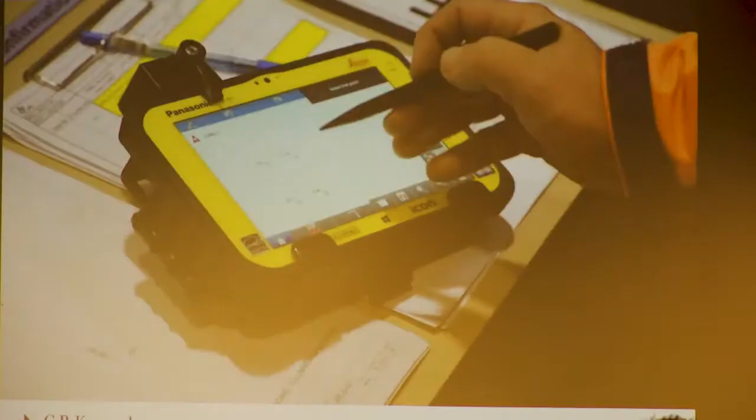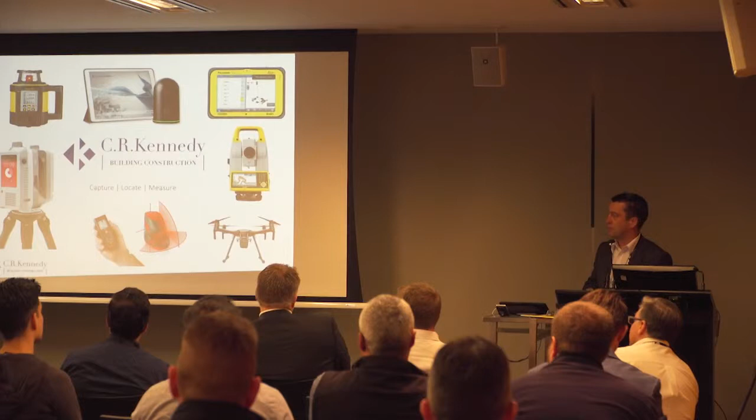That gives a little snapshot of the types of solutions we offer in terms of everything you've seen here in the last few days, scanners and total stations, and the solutions that go with them. Our range of products, solutions and expertise extends well beyond that into everything from laser levels to UAVs and the high-tech drones that we provide.

So that's all good and well. We're very happy to be involved in technology and everything that it brings, but I think our key strength is the company we work for and the people involved in that company.

We're quite a big national company, offices in every city. We've got around 100 staff just in our survey division, and probably 250 staff all up. The offices all contain technical support, teams sitting behind the phones doing backup and support. We have dedicated service centres as well, because for this type of equipment you need the requirement to keep it up and running and valid in the field. So we've got offices fully equipped with the necessary servicing support, all accredited by Leica.

A lot of that you can gain from our website. But drilling down a little further, within our building construction team there's myself here in Victoria, there's Matt Rumbelow, who I'll introduce in a minute, he's based in Adelaide but covers a fair bit of territory, Chris Johnson in Brisbane who's on the road a lot, and we've got Rusty Webb over in Perth. These are the guys dedicated to our building construction segment, supported by the larger C.R. Kennedy community.

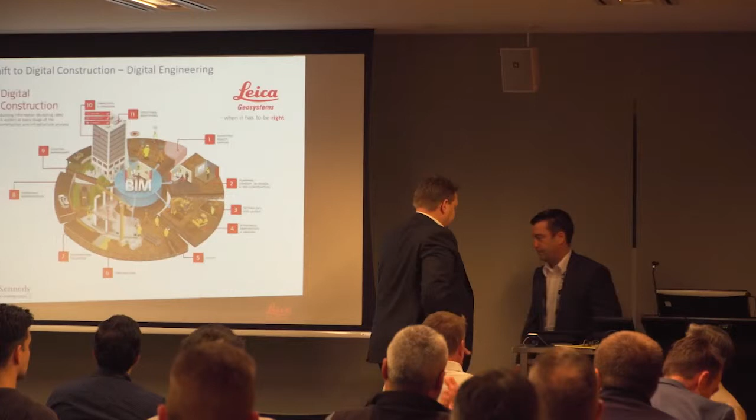Thank you very much, Bernie, and good to be with the AMCA yet again. It's good to have some continuous involvement, which is key to making that relationship work. Good to see some new faces in the front, some old faces I know from around the back, and some sad faces at the back. We'll see how it goes for the rest of the presentation.

Now, it wouldn't be a BIM presentation if we didn't have a pie chart of some description. So this is Leica's pie chart. It's actually pretty good. This is part of a campaign, I guess you'd call it, but it's also a booklet that's out the front, and we can provide some digital versions of it if you like, called The Shift to Digital Construction.

It covers all of Leica's involvement, as Bernie said, from civil works, coming out for earthworks, all the way through to building management. So it's a good one to keep referring to constantly about where this sits and how these tools we're going to see today can be used across multiple segments. We've got multiple customer bases now who cross over in some cases, and in other cases hand through the data, which is great.

So I'm going to start with the video. Autodesk trained me well. Now this is basically a review of probably the biggest product that we've had for a long time, and as far as impacting most industries that Leica wasn't normally associated with, it's the BLK. It's actually here. I understand if you didn't see it because it's that small, but I'll just recap what the BLK is for some of you in the room.

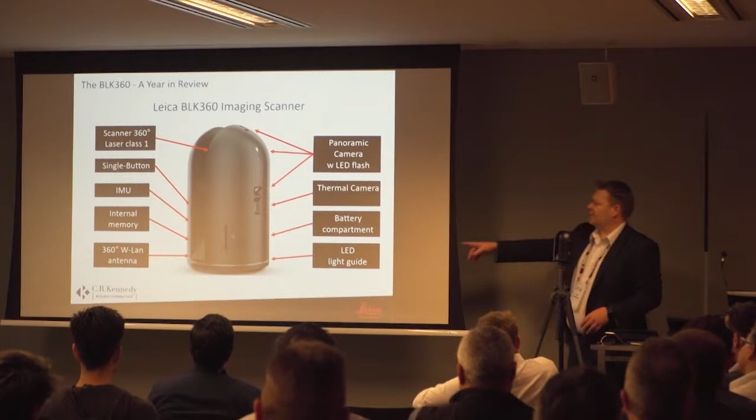That's it. So all crammed into this device here are all of these features and probably some more. But certainly I made the title A Year in Review. It hasn't even really been a year that we've had the BLK, and already we've sold lots, volumes, but also more importantly, who we've sold it to.

People who wouldn't have normally got into the scanning market at all, wouldn't normally have been able to integrate scanning as part of their normal deliverable. And so that's engineers, that's some manufacturers, a pool repair company, climbing wall guys. Yeah, amazing. Just amazing uptake of this device.

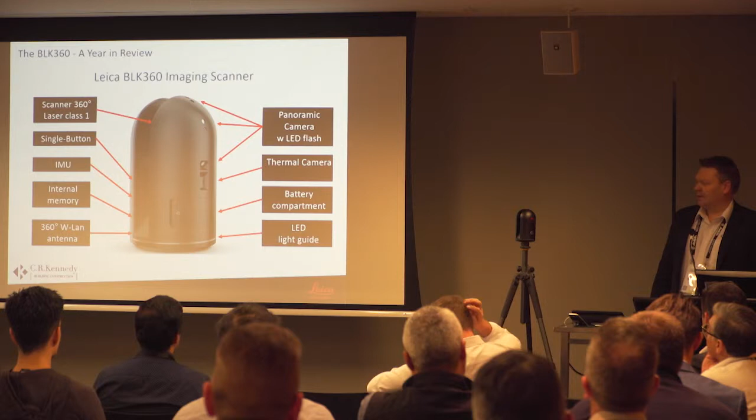And for those of you who are a little bit interested in LinkedIn and online, there's a guy who's pretty prolific now, no it's not me, who's from the film industry. He's talking about how it's used in set design, lighting design. Actually, lighting design, we've got another customer whose true story will be appearing in the next Leica magazine. They do projections and nighttime projections against built assets. So yeah, amazing.

That's obviously in no small part due to the collaboration, the working relationship with Autodesk. They were heavily involved in the BLK from its inception. Obviously, from a software point of view, it ships in the box with Autodesk Recap. That means it goes straight into your BIM workflows with very little skilling up. It's certainly almost a single button operation - there's only one button on the front, that's for sure. With a little bit of understanding of Recap and how the clouds go together, it's an amazing tool.

Now, things have been extended, I guess, in the way that the BLK works, and certainly in relation to thermal, that's now been released across all the Leica products. There's a lot of interest in how that might apply to building design and getting feedback from an initial understanding of a space and thermal performance of a space. So that's something I think we'll see a lot more of.

And the ability of just sharing those 360 panoramas is extremely impressive. So much so that we've actually had good success with some of the smaller non-Leica 360 cameras, just to get that idea of a spatial capture when you don't really need to go into a full scanning machine.

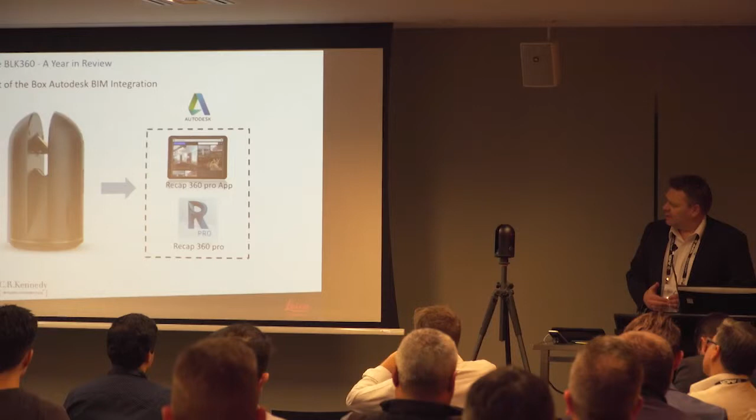So that's great. Now, speaking of that software, that's basically the way it shipped, which was Recap Mobile, the first app that was developed for it, which allowed you to use it from your existing, almost your existing, as long as an iPad Pro, existing hardware, and then transferred straight through into Recap desktop and therefore the BIM solutions from Autodesk.

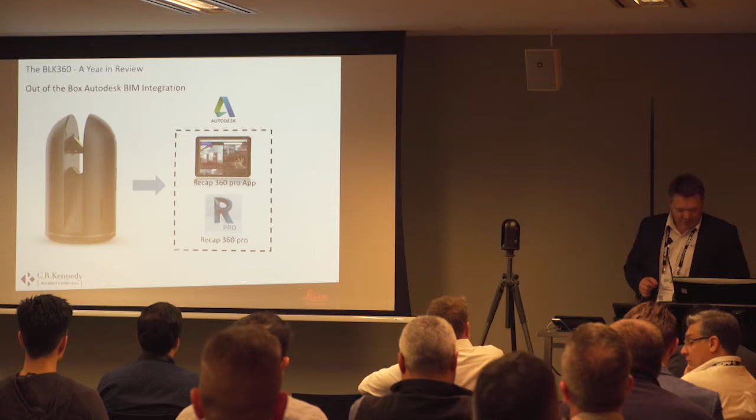A few months afterwards, there was the release of the Leica Cyclone Register 360 - it's a long name - and that's a newly written interface into how you can acquire Leica scans. In the past, and I'm one of them, the Cyclone system is particularly particular, and a bit hard to get your head around. This has been a redesigned interface and a much smoother workflow, and you'll see a lot more development within that Register 360, which is sort of the entry level of the Leica platform, which is great to see.

There's more a consumer-focused BLK app. That's just had its almost year anniversary and its first point release, so that's 1.1. And that allows you for free to take 360s, simple scans, measure on site, and export to E57, which is a common file format. So that's a great way of working as well.

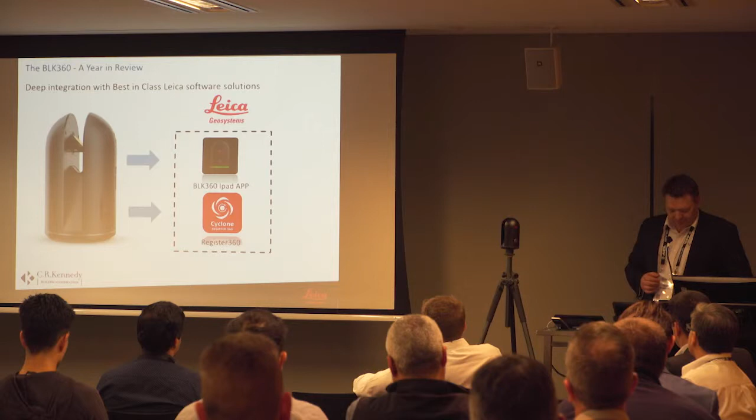And then, literally 5 months ago, no, less - we've been using it for longer, but as far as public release - Matterport, which is an extremely well-known spatial capture system as well, but photographic, not laser.

We now have the ability to integrate with their system, so they can use both the BLK hardware and the Matterport hardware, or if the need arises, just the BLK alone, but in their own system. That allows a whole industry, really, of real estate capture, asset capture, to use the BLK now without any training at all, because it fits in their software and in their workflows already. It's just another camera that connects. I think you'll see a lot more of that sort of openness in this type of device as well. So yeah, probably the smallest and the most open of the hardware that's around for scanning, which is great.

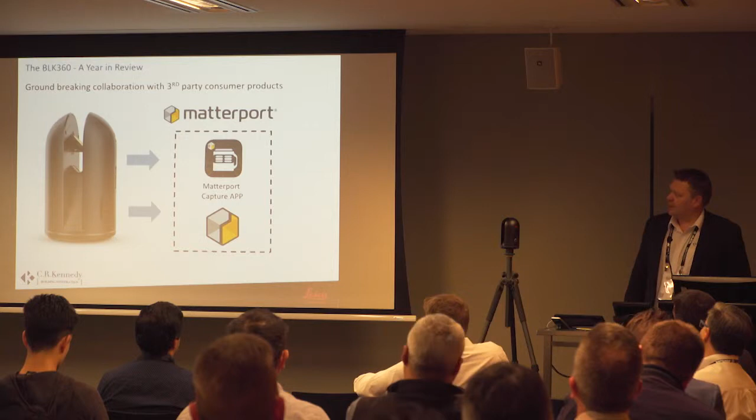What I wanted to do in this section about reviewing where we're up to with the BLK is just show some examples. This is a company that I work with in Adelaide. They have a Melbourne office, and they put together this video basically to show us what they've been up to.

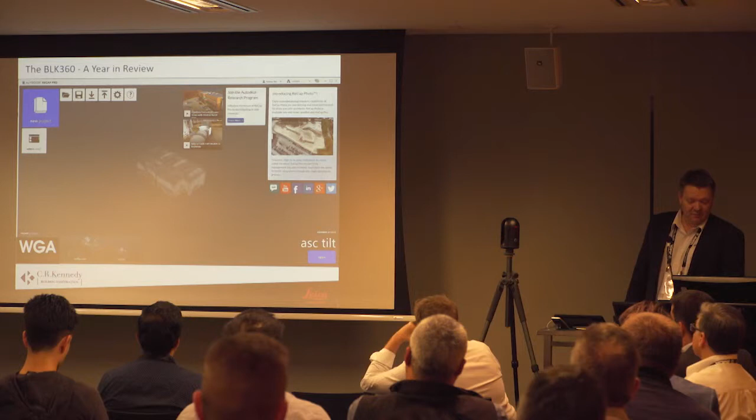So Wallbridge Gilbert Aztec are structural engineers. They have a bit of civil engineering as well. They've utilised point clouds in the past through engaging surveyors, but they wanted to bring on this hardware to allow them to do jobs ad hoc, and they were pretty confident they could handle jobs this size.

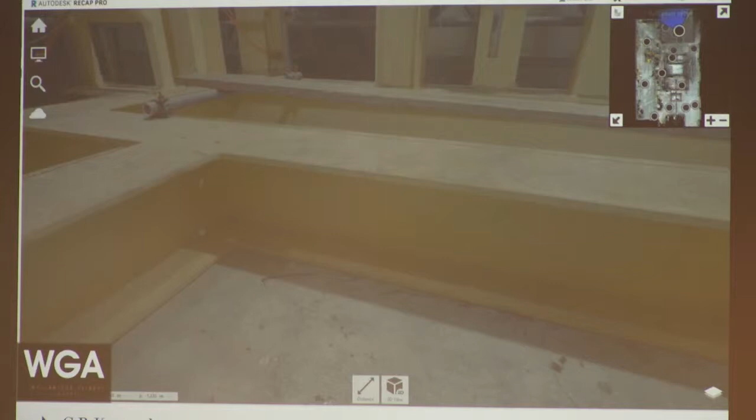They still engage surveyors for larger work, but this is well, I can't tell you where this is, but it rhymes with submarine, a facility in South Australia.

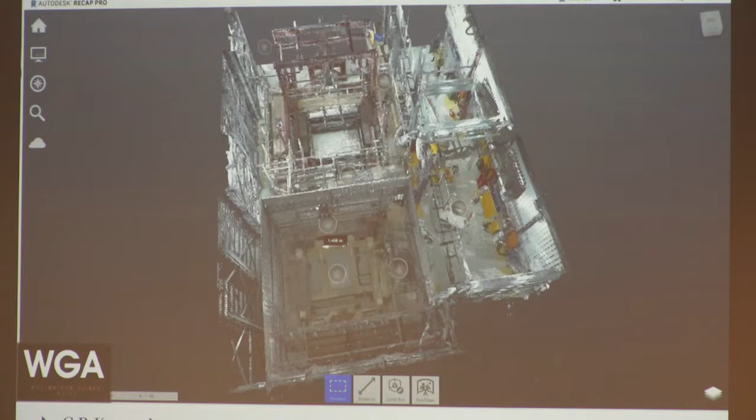So their workflow is taking this scan set for this job into Inventor, so Autodesk Inventor, a manufacturing fabrication type tool. Actually, you can see it here now. And then they do assessments on the structure and some additions for some change in some engine requirements where that was going into.

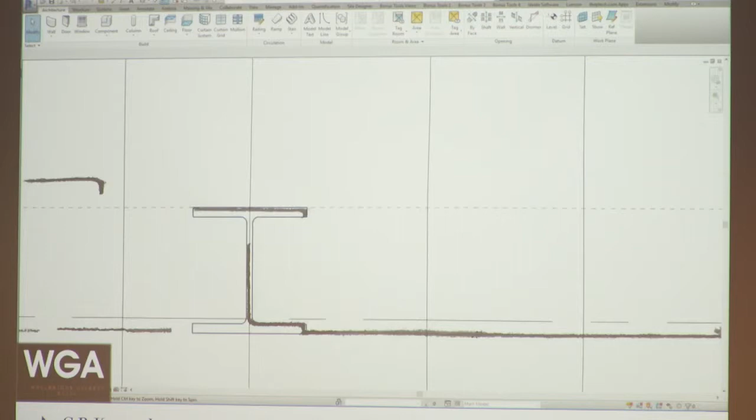So they admit they're fairly new to this workflow. They're not using any sophisticated extraction tools or fitting tools. Certainly that's on their path, and we hope to be able to assist them and do a little bit more analysis of the scans as they bring it in.

Interestingly, they bought only 2 months ago, really. So when the RTC - I don't want to ruin your announcement, Greg - they were initially a bit peeved. They wanted to buy it as well, but they admitted that their directors probably wouldn't have gone to that level straight away.

They needed something more of an entry-level machine to prove its worth, show how it would integrate with their delivery, show how they could schedule it between offices. They've got 3 offices. So yeah, it's a perfect sort of step into spatial capture.

And we'll finish on this one when it comes to the BLK. This was announced last night, so just in time for us.

My name's Brian Nickel. I'm the engineering division manager for Harvey's in Bozeman, Montana. We're a mechanical engineering firm, and we work plumbing, heating, geothermal, sheet metal fabrication, as well as hydronics and radiant heat in the Gallatin Valley.

It's been around for almost 30 years. It started by Bob Harvey's father, Sam, and it started as a 2-man mom and pop shop, and it sort of evolved into a multifaceted fabrication firm.

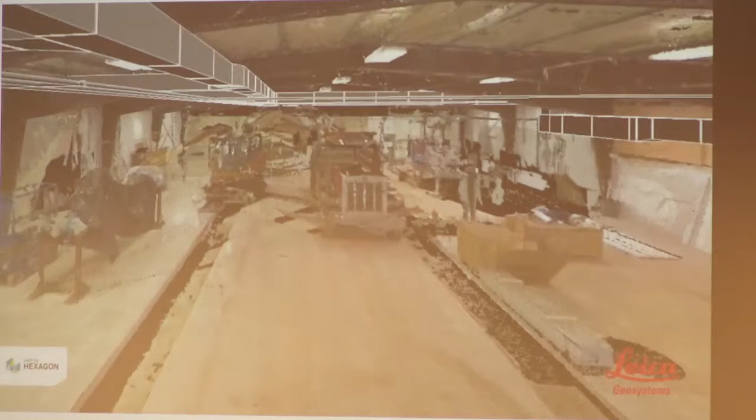Clients appreciate the most about working with Harvey's the deliverable that we offer. Since implementing our Leica BLK 360 scanners, we've been able to provide them with as-built digital reconstruction point clouds of their homes. And so that works in numerous methods.

Down the road, if there's a serviceability issue or some sort of event arises, they're able to reference back to that, and our service division is able to reference back, and it mitigates a lot of the reconstruction or deconstruction of retrofitting and modification needs.

We rely primarily on Leica Geosystems because the BLK 360 allows us to do our job right and to do it once. We don't have to go back and forth between the schematic drawings and our engineered drawings.

We're able to go out, scan the existing conditions, get real world verification, bring that back into our office without any sort of missing information because it's captured the existing conditions. We're able to validate what we've engineered and what we've designed to coordinate with other systems, electricians, subcontractors, other entities that are involved, and it ensures that the client is getting that end deliverable.

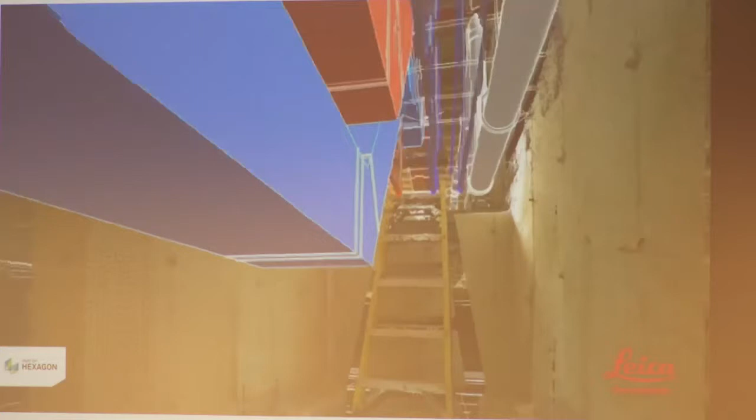The number one thing that our company, Harvey's, preaches to not just our employees, but also towards future clients, is that we provide quality with integrity that you can trust.

So it's a matter of understanding and communicating to the clients that our end goal is the deliverable for the client. It's holistic. It's a holistic vision. We want to be able to provide the client with a deliverable that is valuable, that means something.

More often than not, a client will go to a mechanical engineer, provide a schematic drawing of what's going in their home, and then send that out to several contractors, and it'll end up getting broken down into something completely different than what was initially designed. So our mission moving forward as Harvey's Engineering is to provide that deliverable to the client of what is actually going into that client's home.

And it's for the added benefit that the client can have bargaining power in the future. They can actually negotiate future services that need to be done in their home because they have the documented systems in their hand, in their pocket.

But that was the BLK, and certainly we see it just growing as far as its input and impact into the market. But we were asked a few times, 'That's great, I like it. Have you got anything just a little bit better?' And now we have. So with that, I'll pass you on to Gregg.

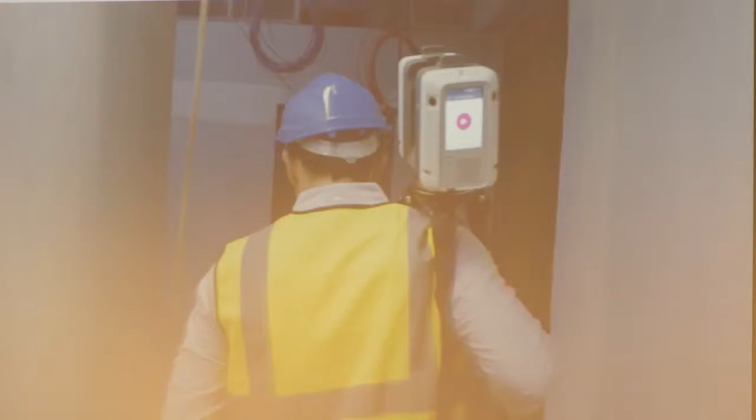In seconds, the Field 360 app links the scans, stitching them together into one clear point cloud that helps me do my job faster, easier, and with greater accuracy. Back in the office, it's time to check the scan data and catch up with the rest of the team. The RTC 360 has changed the way I do my job for the better. Documentation and workflow are simpler and quicker. I get so much more done in a day.

With powerful automated software tools, I can focus on what's important, digging into the project's details and getting on with the next. Thanks, Leica Geosystems.

So the RTC was several years in the making. The RTC stands for reality capture. And there's some very, very interesting and unique technology inside, which we'll talk about in the coming slides.

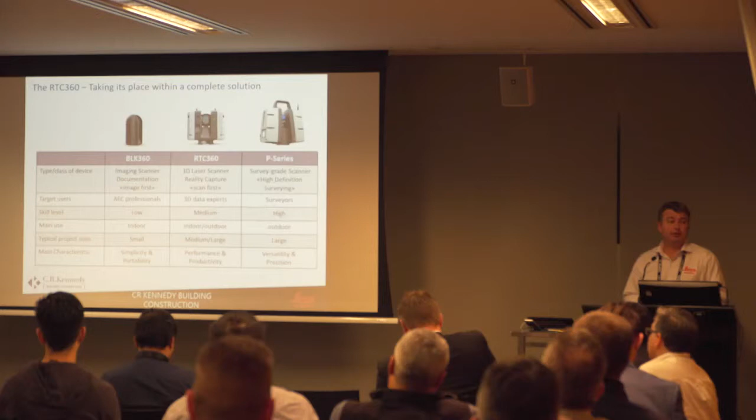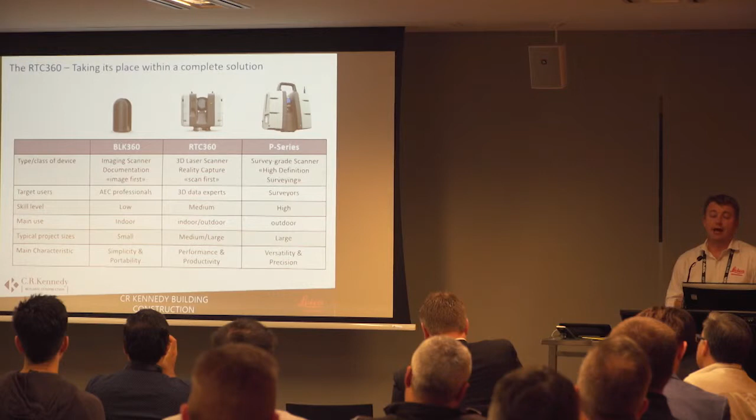As Matt said, 12 months ago, we released the BLK, which has been fantastic. If you need to do things like check verticality of facades or you need longer range, our P series is still what we call our survey grade. But between the P series and the BLK, we had quite a large gap, and the RTC fills that gap really, really nicely. There's a number of key features about this which makes it so much faster than everything else on the market, and one of those is the 2 million points per second, which you've probably all heard about, and the other one is the VIS technology.

And the RTC has really been from the outset targeted towards plant and building construction, and actually a third segment as well, which is public safety—the police force, crime accidents, car accidents and things like that. But definitely plant and building construction is the key market that we will see the RTC for.

So right from the start, it was really aimed for people like you. It was not aimed for traditional surveyors. And for that, we wanted to have as automated a process as possible. We wanted to have in-field checks to give you a nice, warm, fuzzy feeling.

It was all about the images being just as important as the scan data. The other part was that we wanted to have a solution approach rather than just building the hardware and then thinking about what happens downstream. So the solution itself is made of 3 parts.

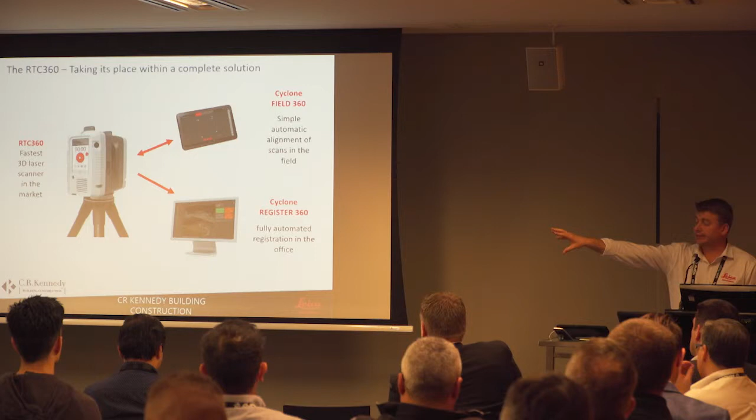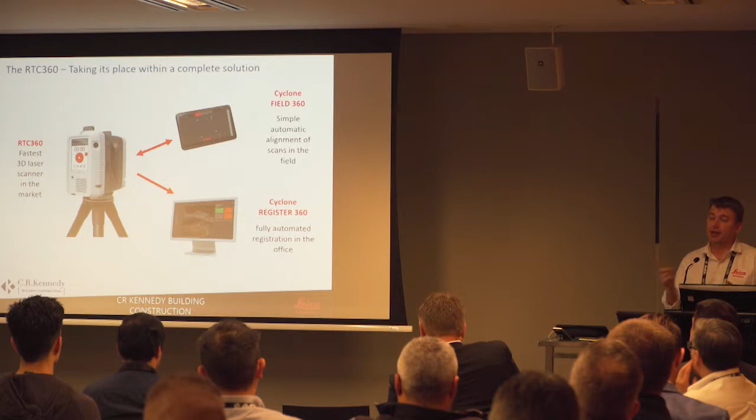It's the RTC 360 unit itself. There's some Field 360 software which sits on a tablet, which really takes away that pinch point of the registration, which previously happened back in the office, which is great for new users. And then the third piece is the Cyclone Register 360 software, which you use back in the office.

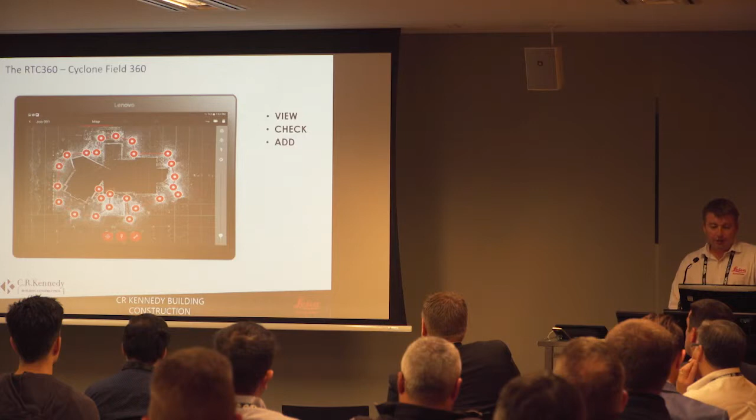So the software on the tablet, Field 360, lets you see the scans as they come in real time. So you can see the project build up as you work around, which is great because you can see the areas that you've missed and make sure that you're capturing them.

And the Cyclone Register 360, as Matt said, it's really about trying to make that as streamlined as possible. And as we say, it's drag, drop and done. It's really made it as easy as possible to do reality capture.

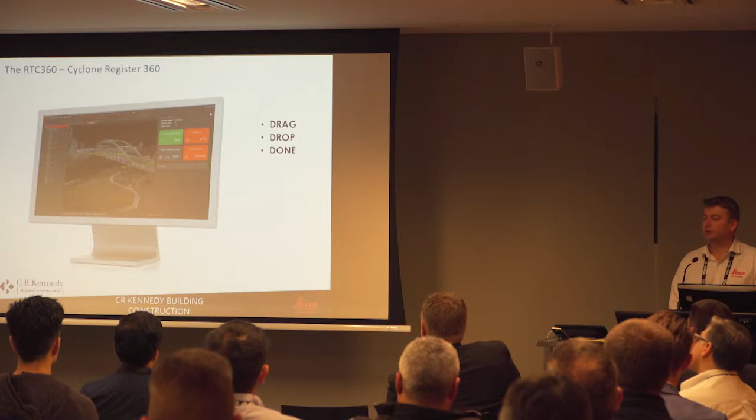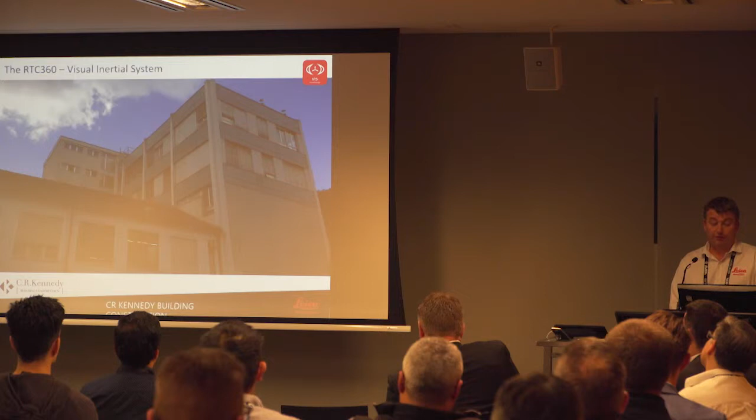As I said, there's some really interesting, unique technology inside the RTC 360. One of them is what we call the VIS, the Visual Inertial System. We've got this great little clip here, which is going to show you what's happening. There's actually 5 cameras on the RTC, which are continually tracking as you move around.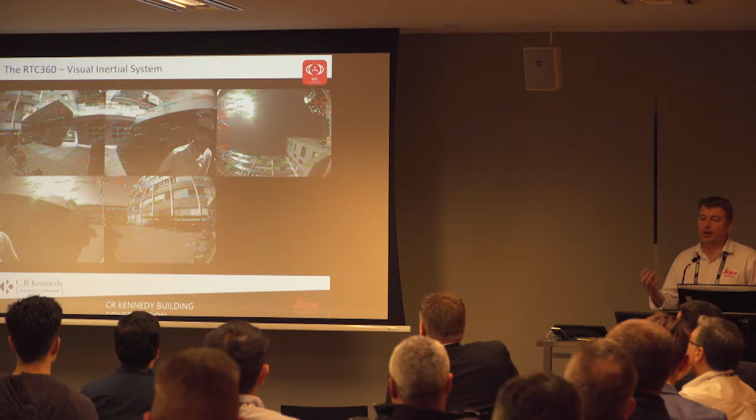So all you do is turn it on or off. You don't have to think about anything else. As you're moving around, those 5 cameras are just keeping track of where you've been and where you've gone, so that when the scan's finished, it automatically knows where that scan is in relation to the previous scan. So that's a really powerful process, which makes it just so much easier for new users to use.

The other new piece of technology is this, which is what we call the double scan. Because it scans so fast, the head designer said, well, how can we utilise that? So what he thought is, if we can do 2 scans consecutively and compare the first scan with the second scan, you can identify pedestrian traffic or road traffic, which makes that cleaning up process much, much quicker and easier.

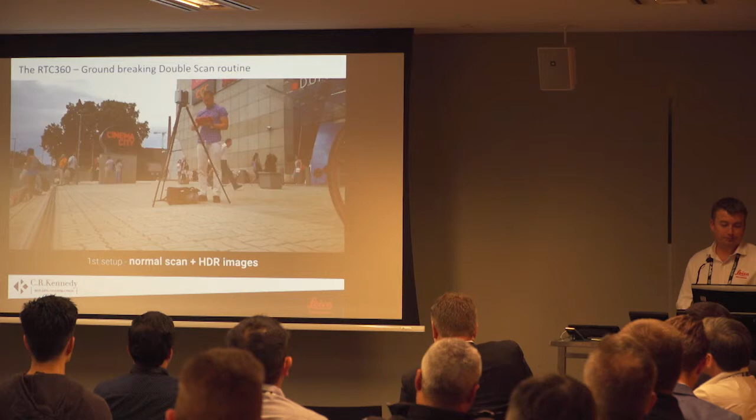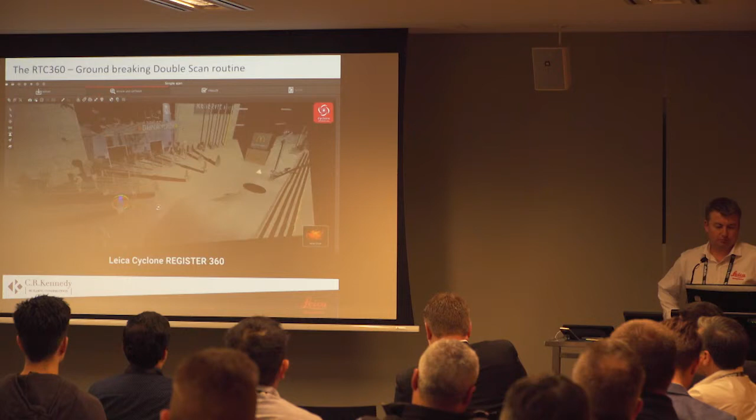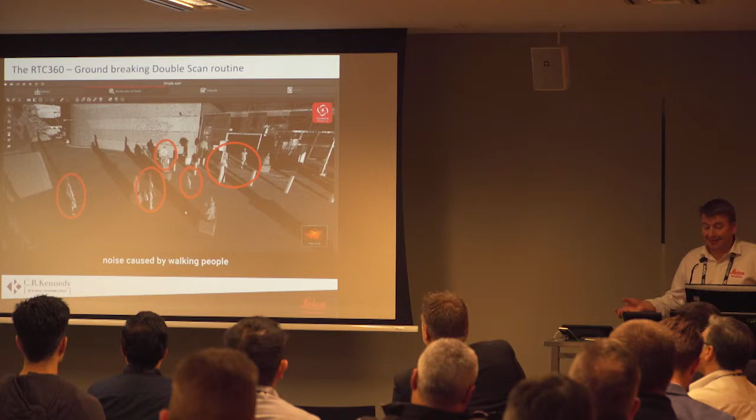And as you can see, we're outside a shopping centre with a lot of pedestrian traffic. So that's showing one of the scans, what it would normally look like with all the pedestrians in there. And then when you bring that double scan into Register 360, it identifies the areas that weren't in the previous scan and it deletes them for you. So you can see pretty much most of that pedestrian foot traffic has disappeared.

Two very, really interesting, unique pieces of technology which really help you out. So let's have a look at how this works.

So I've connected to the tablet and all I've done is just press scan. We can see that the RTC has already started to scan. So I've got this set at a medium scan. There's 3 resolutions that we can scan at. Most people we think will use the medium resolution scan.

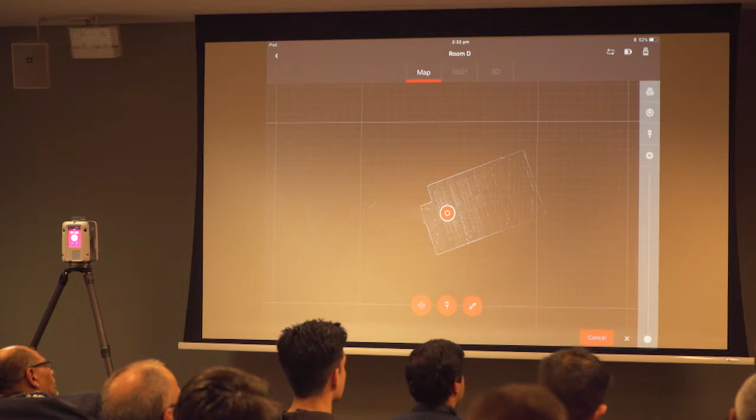At the moment it's scanning at 2 million points per second because there's a double pulse. That's quite a technical feature of it, which enables white surfaces to be scanned really well, but it also enables black surfaces to be scanned really well. So that's another piece of interesting technology in there.

When it's capturing images, it captures an HDR image. It will always capture 5 brackets. Like I said, it's been designed to be very user-friendly. You're either capturing colour or you're not. It does sound like it's going to take off, but it's just going really, really fast.

When it captures the images, it will always be a minute. It won't be more or won't be less. So that's one of the reasons why it's so fast. It's not only the 2 million points per second, it's the really fast HDR capture, and it's this VIS process that we talked about, which overall, when you combine that, you're really gaining multiple efficiencies in capturing your data.

So the scan's finished, and now it's capturing the images. Like I said, that'll take a minute. And previously, before you guys walked in, you can see that little red dot on the screen. That was the first scan, which was taken up there.

The other interesting thing is there's 2 Batman ears on top of the instrument - they're 2 Wi-Fi antennas. That's one of the things that makes this process so fast. A lot of other instruments just have 1 antenna, and that transfer of data across is a really critical part of the process, which slows a lot of other instruments down.

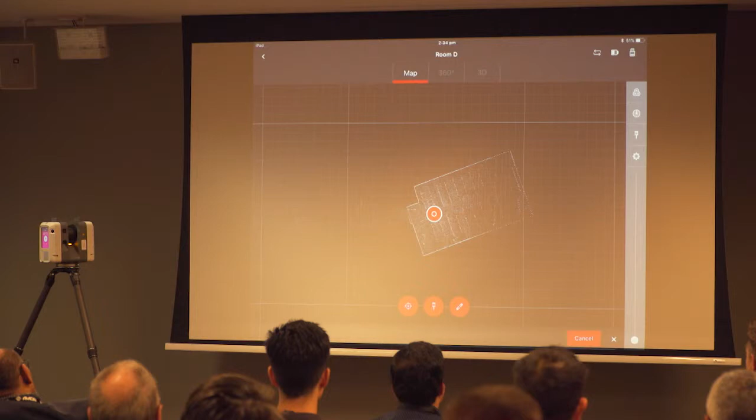It's almost there, the progress bar down the bottom. I don't think you can see that because the bottom of the projector screen's not quite there, but it's just about finished. Well, there we go, ding, the light will go green.

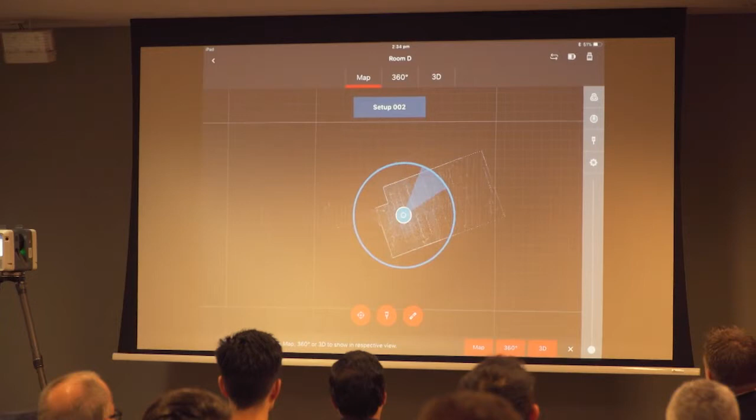Oh, hasn't worked. But that's okay. One of the things we can do, if we do it right, is I can rotate that around. And this is one of the things a lot of people ask - do we have to use the tablet? And the answer is no. You can actually do this without the tablet, and it'll work quite well.

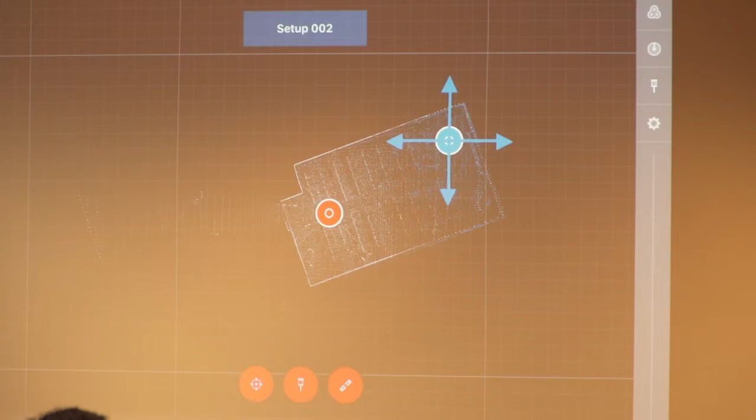All I'm doing here is just moving that into place. I'll get rid of that. And I'm going to link those two, start the alignment, optimize it. You'll see those two join together, and then we create the link.

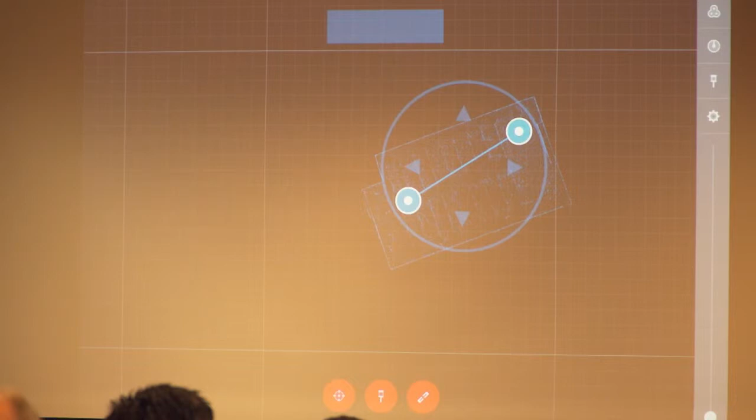So in the nature of live demonstrations, it's one of those technologies. If I walked out now, the green light you would see blinking, and that means the VIS is working. It actually tracks for 2.5 minutes. That's one of the unique things about it - if you have an IMU or something like that, it will start to drift, but because it's using photogrammetry, it can track in real time. So it's quite an impressive thing to do.

You see the 3Ds as well? Oh yes, sorry, yeah, that's one of the other things. So once that's finished, I can pick that scan. This is the imagery. One of the interesting things why it's so fast is the RTC creates what we call a lightweight preview object, so it's not transferring the whole 500-600 megabyte file, it's transferring a lightweight version of it. So what we see here is a preview of the image.

I can actually change it so it's automatically changed the exposure, so it just makes it easier to see. And then I can take that back. The other thing is we can bring up the actual point cloud itself - that was the first scan I did previously where there's nobody in there. As I said, you can see the project build up in real time, which makes sure that you're capturing what you need to capture. So that combination of instrument and software just really makes it much easier to use.

All right, go back to here.

So then the other part of the solution is software, and what we've just recently announced is our single file format, which is LGS. There's been a couple of reasons why we've decided to release the single file. One is we've got a couple of different workflows, and each of those had different file formats, so to streamline that process, we've brought in the LGS file.

The other thing that it does is we're capturing more information. One of the things I didn't show you is we can actually tag in the field. So I can connect 5 tablets, for example, or 2 tablets, and I could be controlling the scanner while Matt could be walking around with his tablet taking pictures of PowerPoints or fire extinguisher labels, to make sure it's the right type of fire extinguisher installed, serial numbers of pumps, and that can get tagged and embedded in the scan data. That gets pulled through in the LGS file, which can then be imported into AutoCAD, or you can see it in our viewer. It's not coming through in Revit just yet, but it will do in the future.

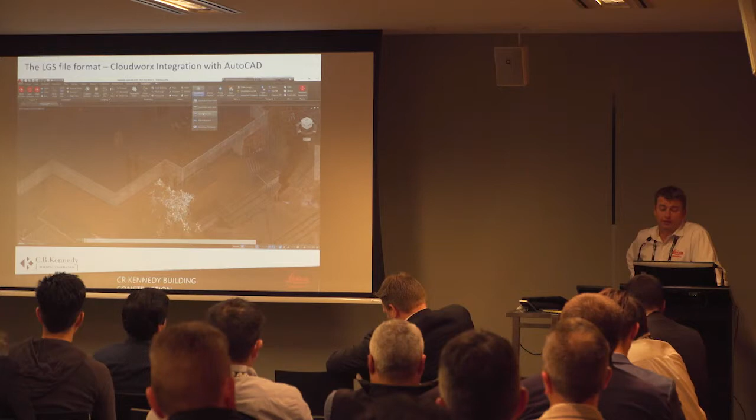This one's just - I know we're in a predominantly Revit environment here, this is obviously in AutoCAD, but this is just to be able to, a lot of people still create some line work, and you have to do it as quickly as possible. This is just an example of a new tool we've released, which is basically cutting a slice through the top of this building, and then you can see the profile of the top of this parapet, and then with 2 clicks we can fit a line to this parapet. So it'll come around, and then we click a seed point and a direction point, and then it'll automatically fit.

There's our seed point and then the direction point, and then it has a bit of a think about where it's got to go.

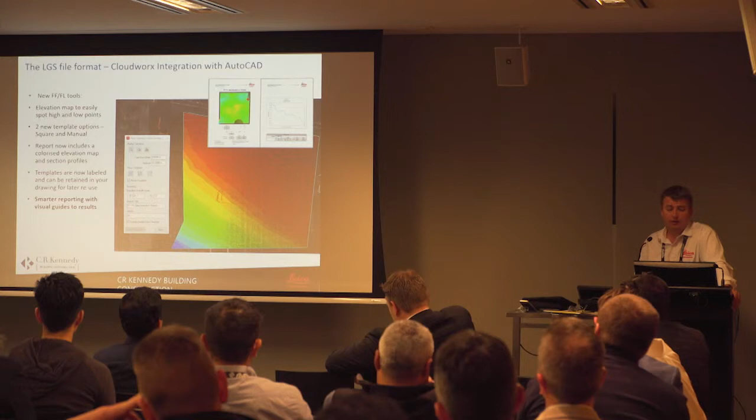And there it is, so that's quite a good time saver. The other thing we can do is floor flatness and floor level reports inside AutoCAD, which is becoming more and more popular. In Revit, we've obviously introduced the LGS format into there.

We can do some really interesting things like aligning the point cloud to the model. This is really, really new. I haven't had a chance to try that, but that's one of the things where a lot of people have been using the BLK, and aligning the scan to the model is one of those pinch points. So we've introduced a function to do that, and also the ability to see the thermal imaging from the BLK as well.

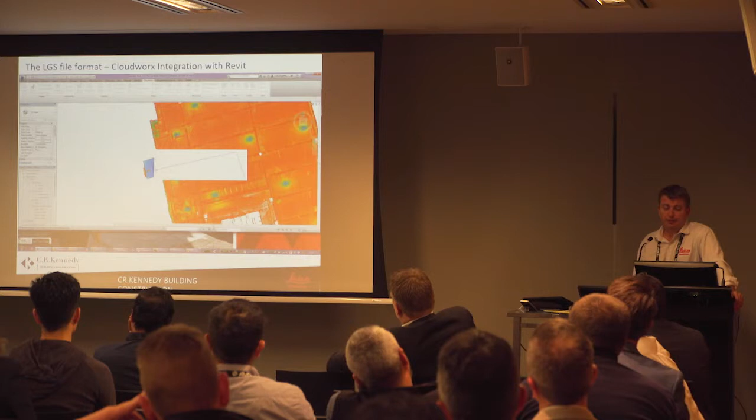This is just some of the other tools we have in here. This is our pipe fitting tool, which works quite well. Here we've got a really good clipping manager, which makes it half the battle, I guess, with point clouds is really focusing on the area of interest, and having good clipping tools makes a big difference. So in this one, all we do is just click 2 points on where the pipe is, and it'll automatically figure out the center line and the diameter for you.

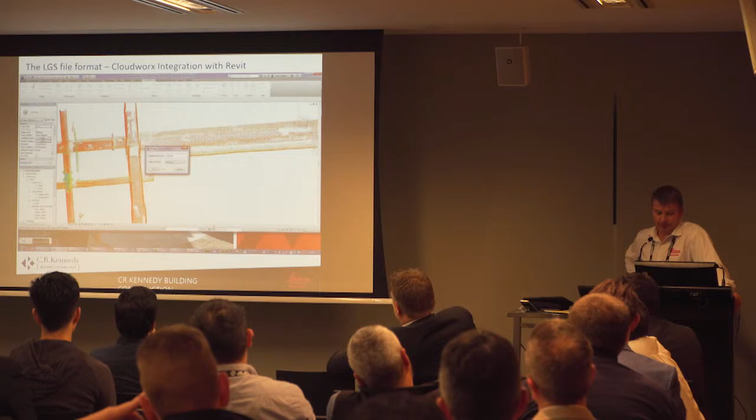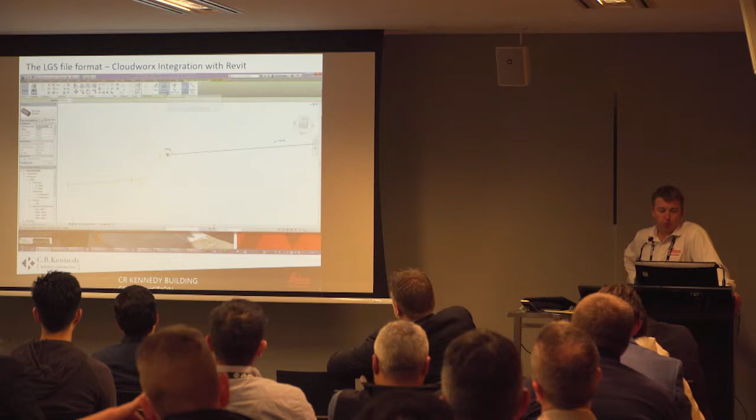So we've got those 3 pipes there. We can hide the point cloud and then connect those. Once we've done that, we convert those to an actual pipe once we finish that last one. Now we're converting to the pipe, and bring back the point cloud. Having a one-button solution just to bring back the point cloud is really good.

Trim those 2 together to get the elbow in. Same for the 3rd one. We can bring back the point cloud again in a second, and then we can change that to like a Y section or something like that.

So that's quite useful. Then we also have the same sort of thing for fitting structural elements. Again, we're just using our sectioning tools to zoom in on these areas of interest, and it's just literally a couple of little clicks, and it's going to fit to a steel catalogue. Do the column, then do the beam. So that's really, really quite useful.

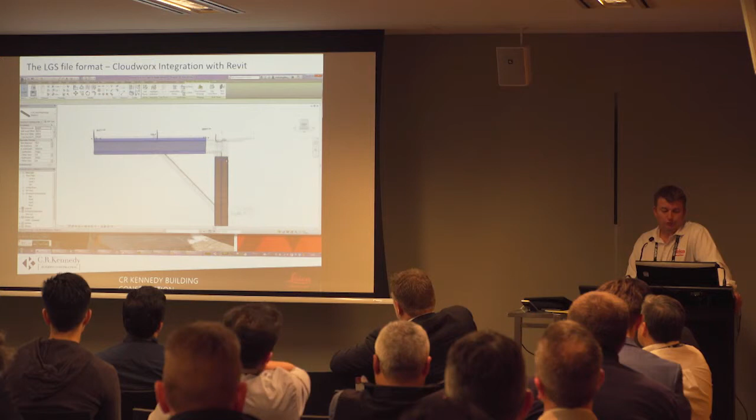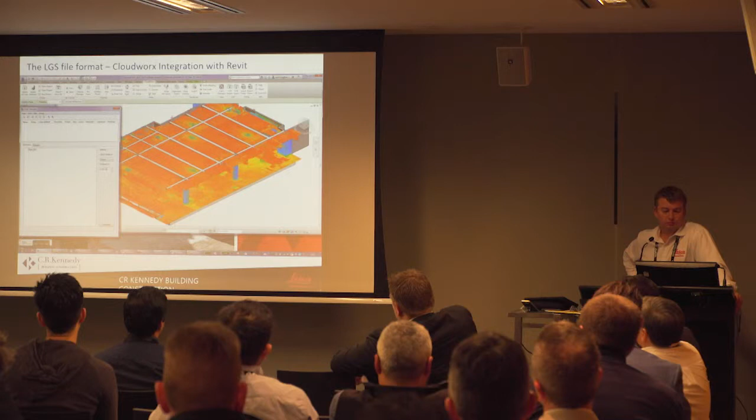There's 2 more slides that I've got to show. This one is doing clash detection inside Revit. Here we're just selecting all the pipes in the model, and then bring back the point cloud. Doing the test now.

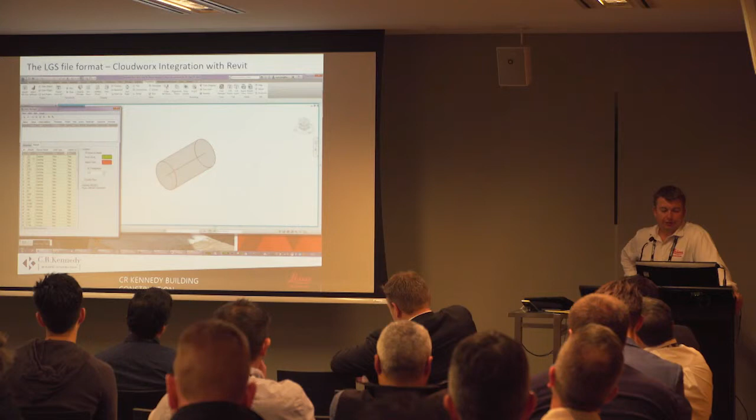And then you can view it in a couple of different ways. You can show it in context or just isolate that particular clash, and obviously you can review those and determine what you need to do with them, which is really, really useful. You can obviously change the view settings as well.

And then the last one is this one. Is that going to work? Maybe click there. No. Oh well, one video out of the whole lot, it's not too bad. Yeah. Oh no, it's going now. Sorry.

So this is a really interesting form of detection. I've just created it. Now we're in Navisworks, and I've created a test, selected all the model components, and now we're going to compare the point cloud to all of those model components to try and identify what hasn't been installed. So it's going to find modelled elements which have no point cloud near it, which is obviously really useful. Now it's identified this light that doesn't have any point cloud around it, so that's what hasn't been installed. So that's quite an interesting function.

So that's all I've got to show. But the RTC has been extremely well received around the world, as we've been showing. It's multiple times in terms of efficiencies that you gain, and we're really excited about it. So thank you very much.

Thank you very much, Greg. How long are we going till? Because I've lost track of time. Five minutes? Excellent, all right, five minutes is more than enough.

Two more things to show. It's been a busy, certainly a busy couple of months. We've had the release of both the RTC, the new software, and also our new digital layout. Could be called Total Stations, but that name doesn't really give it the gravitas that it deserves.

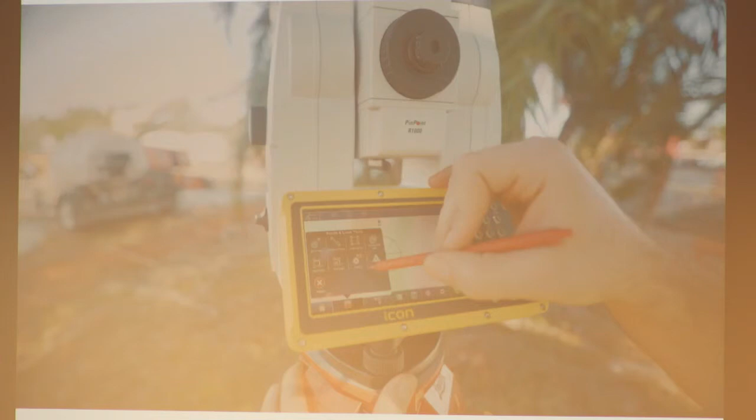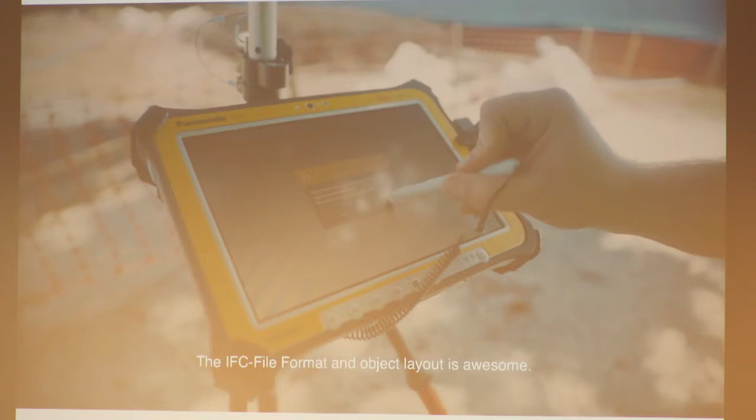Really, anything that can help me do my job faster and more accurately is always welcome. That's the main two drivers when it comes to layout: speed and accuracy. The setup pilot's amazing—you put the tool down, it spins around and automatically stations itself to the construction site. With the ICR80, I'm confident that even the most complex job sites can be done correctly. The biggest speed advantage of this tool is how well it stays locked on. I never have to spend time going back to relock the tool onto the prism. The IFC file format and object layout is awesome. They work so hard on the files in the office, it doesn't make sense not to use it in the field. More data is always better than less.

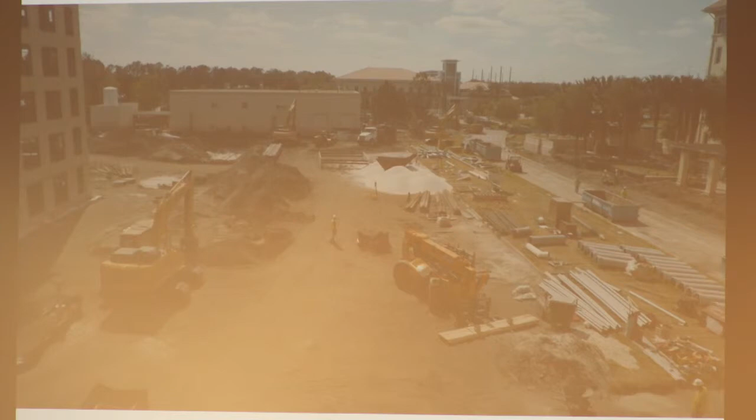Leica Geosystems solutions can be seamlessly embedded into BIM workflows and processes. Leica Geosystems, you know, it has to be right.

The total station, digital setout, digital layout, is basically the way of getting the hard, worked, sweated, scanned BIM models back onto the site, making sure that you can actually install and construct the way it was designed and verified by everyone up to that point. Without a tool like this, I think most of your BIM work's just being wasted to a degree, because you're going back to tapes and measures and chalks and non-digital workflows.

So you may have seen these on site. Just some scenarios where we find they're being used. You heard Vitalik yesterday saying that almost every contractor they deal with has a total station, has a setout, does digital layout. It's not what we're finding here in Australia. There's several reasons for that, especially the way the subcontractor market's been broken up.

But still, the need to actually engage with these sort of tools I think is going to become more and more prevalent, to de-risk, which generally seems to be a catch-all phrase for making sure you don't lose money on the job or the next one. So certainly we've got the technology to do that.

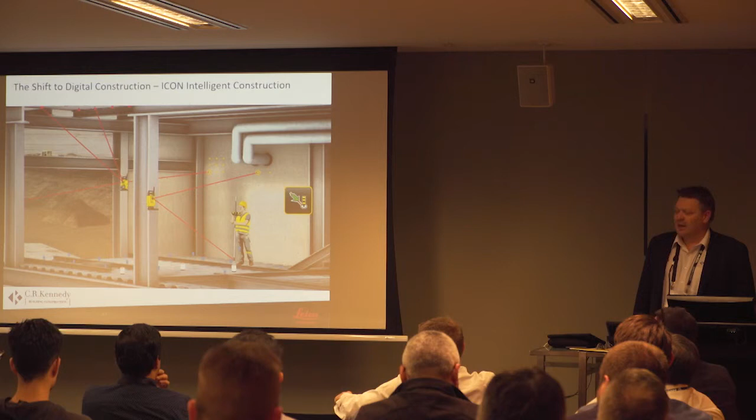Certainly we've got the technology that works through with the existing platforms such as Revit and AutoCAD that you're using, expanding out through those platforms as well, just like in the scanning scenario. And the efficiencies are just a given, I guess, or self-evident for our American friends.

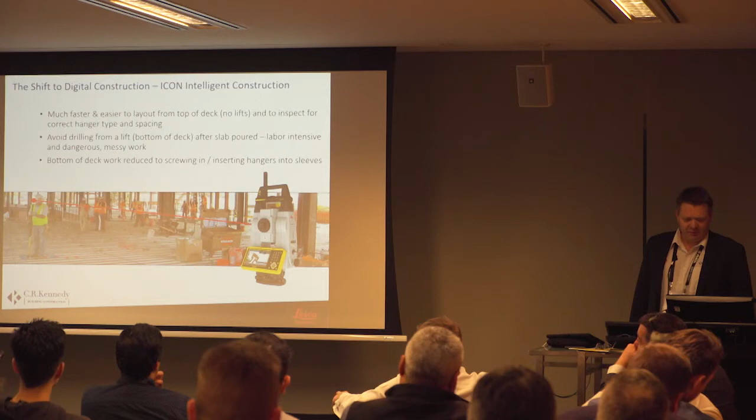I won't go through the video there of how it works in Revit. You can come and see us at the stand, and again, it's a pretty obvious way of going.

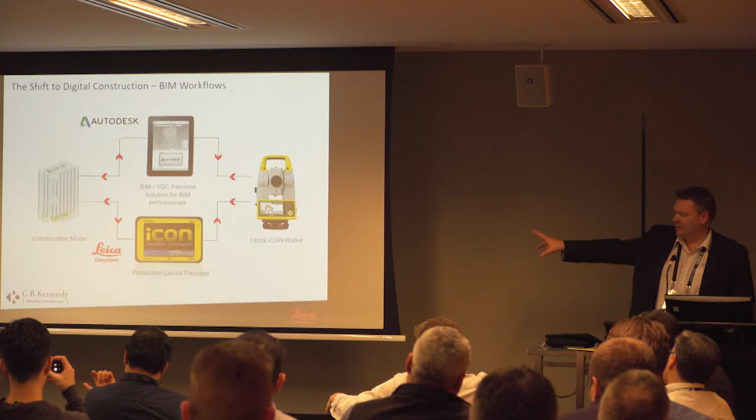But certainly the workflows are, I think, purposely aimed at various parts of the market. You've got a sophisticated site foreman, site manager, installer, maybe in the yellow workflow, which is the iCON, that's our system on our tablets. But there's also an Autodesk workflow that takes that BIM model through BIM 360, which is their cloud solution, and integrates into an iPad workflow for some QA and some verification work as well.

So the acknowledgement there of two different types of utilisation of that data. The iCON system actually also works with our existing surveyor tools as well, so we can actually have surveyors providing an iCON type system and process, which again is great for both the data feedback to the designers and keeping the surveyor involved throughout the process, which is still very important.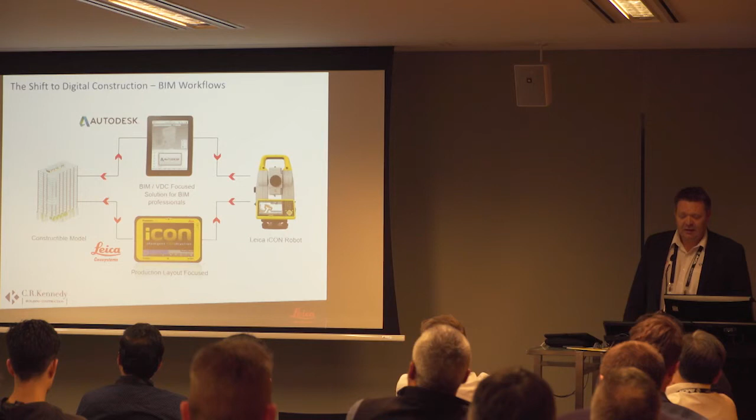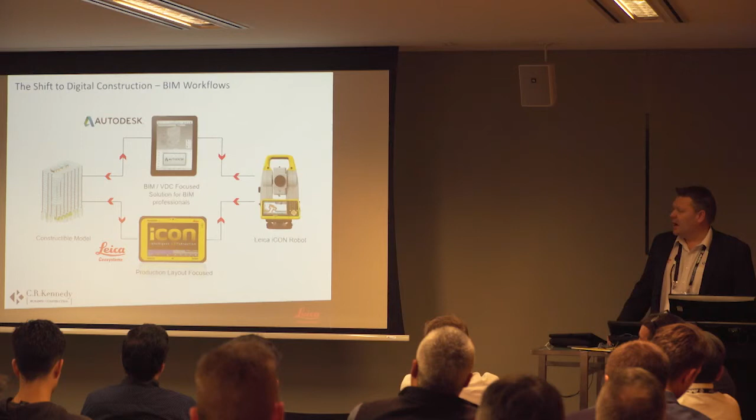The new machines, bigger, faster, stronger, better, all that sort of thing. But certainly on the new ICR 80, the screen is much larger. I still don't think people are going to set out from a model on a screen, but you can certainly verify and check things on site from the screen because the size has got quite large.

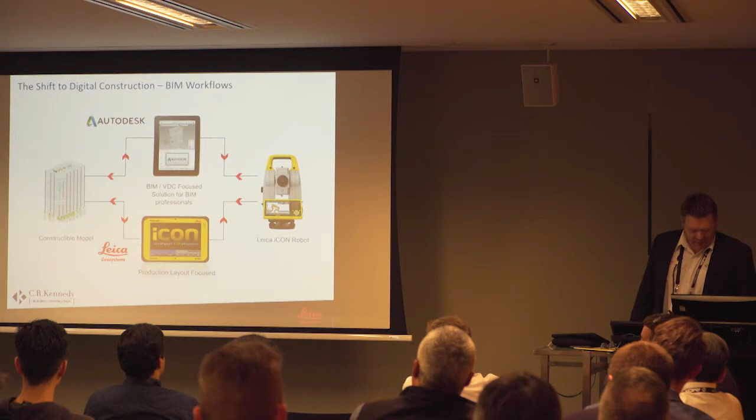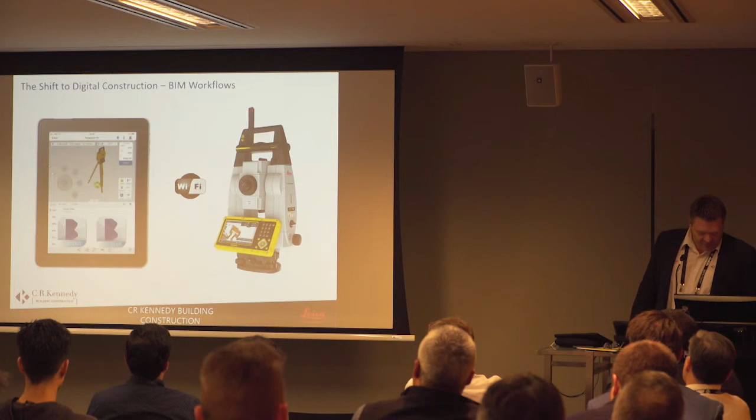This is the interface for those of you who have an Autodesk sort of workflow and mindset. This is the way Autodesk connects to our machine, and you can lay out from that device as well. I would say, however, it's more a QA device. I think there's probably features missing in that iPad approach that you may also need on site.

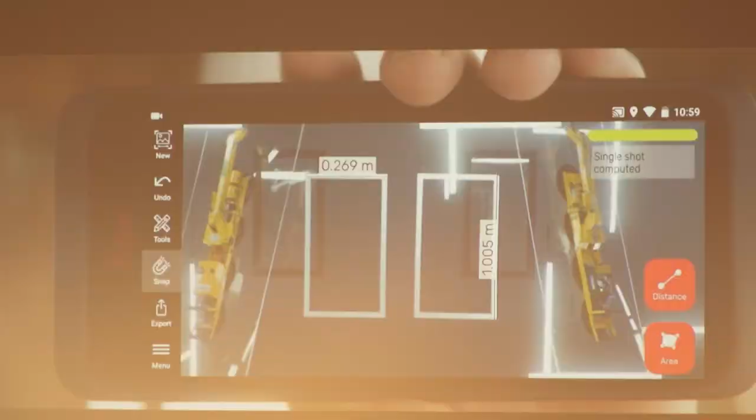So the team behind the BLK360 have done it again. Looking forward to having that available and seeing how that disrupts the market. But certainly it's a combination of all things, but certainly from the creators of Disto, the number one laser distance in the world, and photogrammetry and a whole heap of other tools and tricks in there.